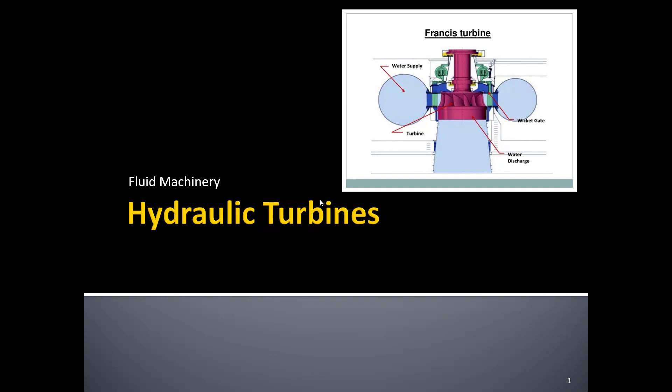Start with hydraulic power plant. The main components of hydraulic power plant or hydroelectric power plant are: one, the storage system; two, the conveying system; and three, hydraulic turbine.

With control system and electric generator, leading to the transmission line. The storage system consists of a reservoir with a dam structure and water flow control in terms of sluices and gates. The reservoir may be at a high level depending on the availability of such location.

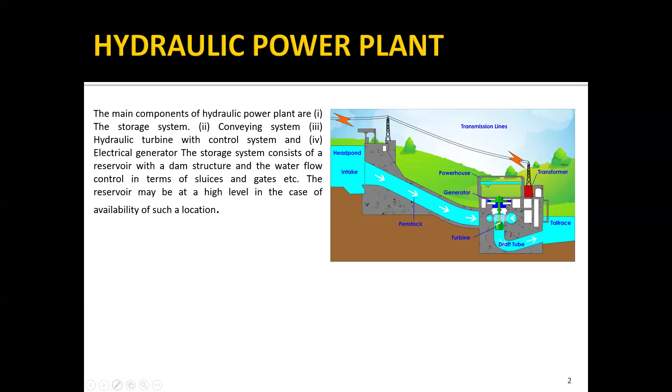So, classification of turbines. We're now on hydraulic turbines. The main classification isn't about the hydroelectric power plant topic, but about the turbine itself. So, the main classification depends upon the type of action of the water on the turbine.

These are: one, the impulse turbine, as shown in this figure. And two, the reaction turbine.

For the explanation: in case of impulse turbine, all the potential energy is converted to kinetic energy in the nozzle. The impulse provided by the jet is used to turn the turbine wheel, then the pressure inside the turbine is atmospheric. So that's the impulse turbine.

In reaction turbines, the available potential energy is progressively converted in the turbine. And the reaction of accelerating water causes the turning of the wheel. These are again divided into radial flow, mixed flow, and axial flow machines. Radial flow machines are found suitable for moderate levels of potential energy and medium quantities of flow.

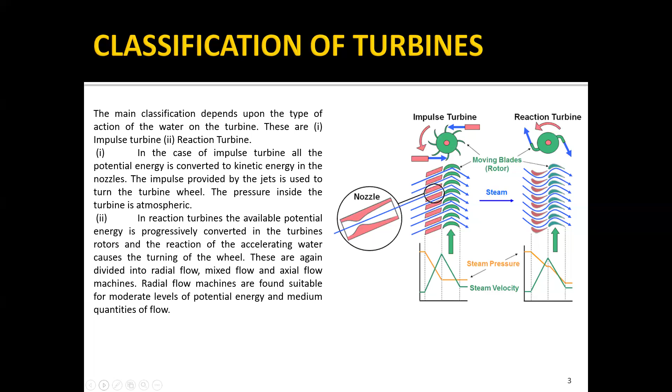So, similitude and model testing - we'll discuss that later. We're just in the introduction here. In fluid mechanics, this topic exists, and in fluid machinery, there's also a topic on similitude and model testing, so we'll discuss that too.

This is for turbines only. Hydraulic turbines are mainly used for power generation, and because of this, these are large and heavy. The operating conditions in terms of available head and load fluctuation vary considerably.

In spite of sophisticated design methodology, it is found the design has to be validated by actual testing. In addition to the operation at design condition, the characteristics of operation under varying input-output conditions should be established. It is found almost impossible to test a full-size unit under laboratory conditions. So in case of variation of the operation from design condition, large units cannot be modified or scrapped easily.

So the idea of similitude and model testing comes to the aid of the manufacturer. Instead of making the actual machine, you make a model first. In the case of this machine, more than three variables affect the characteristic of the machine.

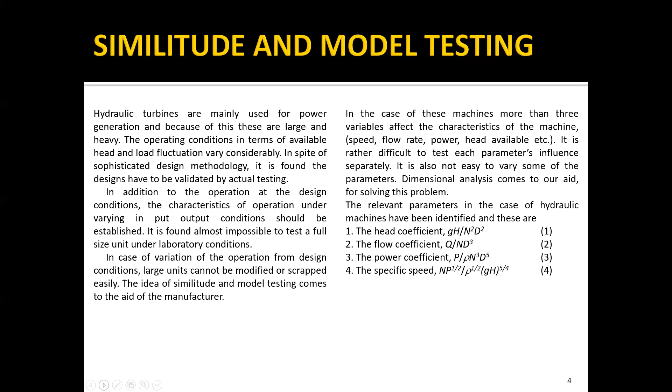Consistent sets of units should be used to obtain numerical values. All the four dimensionless numbers are used in model testing. So if you use consistent units, it becomes dimensionless.

The last parameter has particular value when it comes to choosing a particular type under given available inputs and outputs. This is specific speed, so you base the selection of turbine on this. It has been established partly by experimentation and partly by analysis that the specific speed to some extent indicates the possible type of machine to provide the maximum efficiency under the given conditions.

So figure 1 illustrates this idea. The representation is qualitative only. Note that as head decreases for the same power and speed, the specific speed increases. So this is the dimensionless specific speed.

So its unit is radians, okay? Why radians? That means it's dimensionless. Radians is dimensionless. Why is that so for radians?

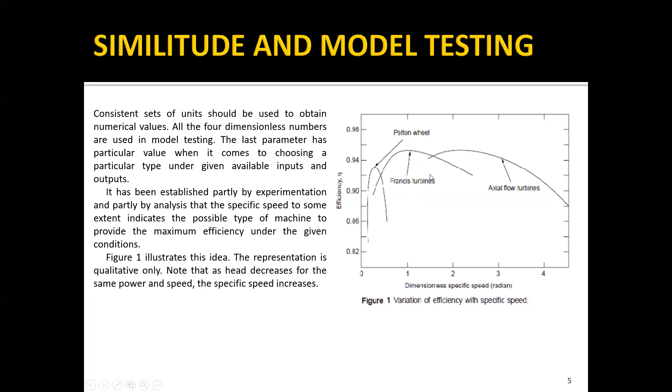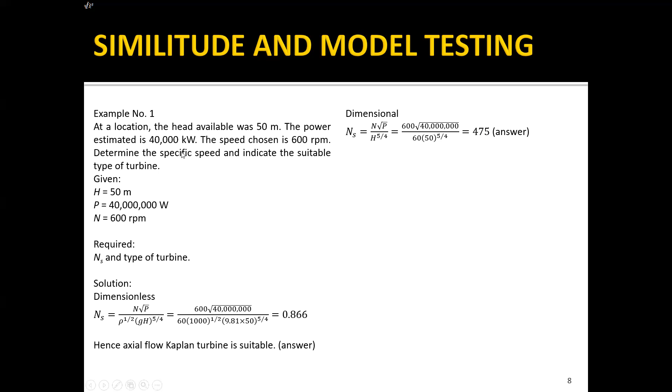Next, model and prototype. It is found not desirable to rely completely on design calculation before manufacturing a large turbine unit.

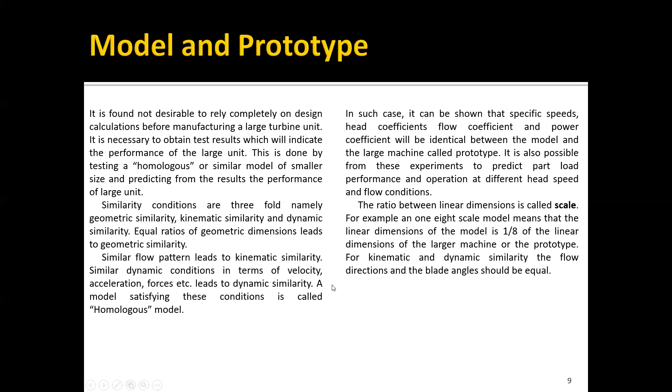Example number 2. At a location, investigation yielded the following data for the installation of a hydro plant. The head available is 200 meters. Power available is 40,000 kilowatts. The speed chosen was 500 RPM.

A model study was proposed. In the laboratory, the head available was 20 meters. It was proposed to construct a 1/6 scale model.

So the actual value, divide by 6, that becomes your model. Determine the speed and dynamometer capacity to test the model. Also, determine the flow rate required in terms of the prototype flow rate. That's for the actual.

Given: HP is equal to 200 meters, HM is 20 meters, PP is 40 million watts, NP is 500 RPM, DM over DP is 1/6. This is the scale model dimension.

Solution: the dimensional specific speed of the proposed turbine, NS, is equal to N times the square root of P over H to the 5/4, which is 500 times the square root of 40 million divided by 60, divided by 200 to the 5/4.

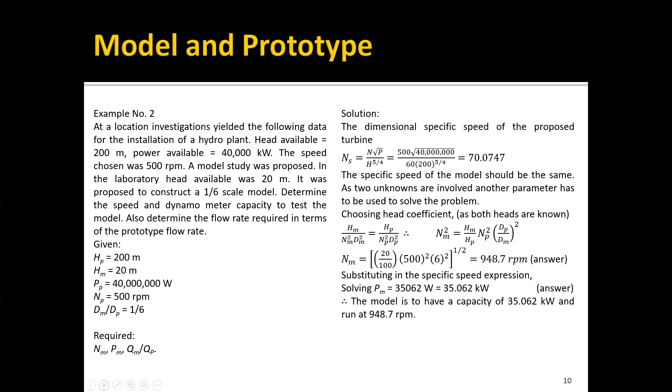NS the same, so solve for P. So the model is to have a capacity of 35.062 kilowatts and run at 948.7 RPM. So substitute and show here how you solved the PM in the specific speed, because it's equal anyway. And the flow ratio can be obtained using the flow coefficient.

So from the flow coefficient, this comes out: QM over QP is equal to NM over NP, and DM cube over DP cube, which is 948.7 over 500 times 1/6 cube, equals 0.0877. Or QM is 1/113 of QP. So that's your answer. For the derivation, that's up to you.

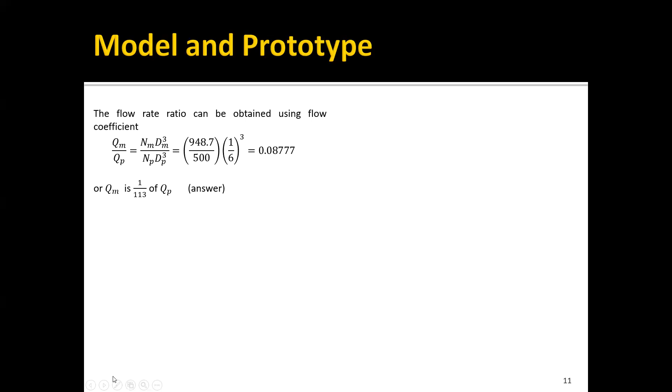So, unit quantities. The dimensionless constants can also be used to predict the performance of a given machine under different conditions, as the linear dimension will be the same and will not be taken into account in the calculation. So the scale is 1.

Thus, the head coefficient will now be h1 over n1 squared d squared is equal to h2 over n2 squared d squared, or h2 over h1 is equal to n2 squared over n1 squared. Now, the head will vary as the square of the speed.

Now, the flow coefficient will lead to q1 over n1 d cube is equal to q2 over n2 d cube, or q2 over q1 is equal to n2 over n1. So the flow coefficient will be proportional to n, and using this previous relation...

q2 over q1 is equal to the square root of h2 over h1, or q over the square root of h is constant for a machine. This constant is called unit discharge. Similarly, n2 over n1 is equal to the square root of h2 over h1, or n over the square root of h is constant. This constant is called unit speed.

Using the power coefficient, p1 over n1 cubed d exponent 5 is equal to p2 over n2 cubed d exponent 5, or p over h exponent 3 over 2 is constant. This constant is called unit power. Hence, when H is varied in a machine, the other quantities can be predicted by the use of unit quantities.

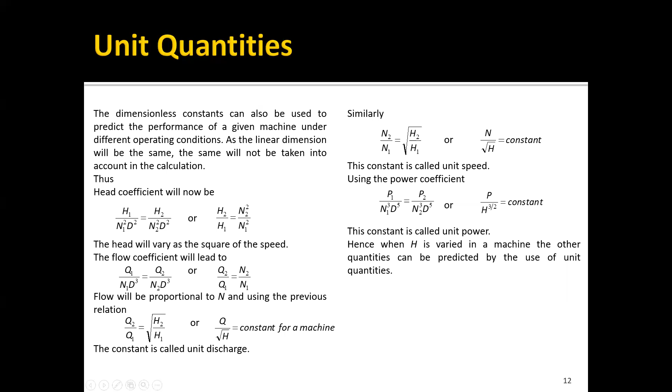Example number 3: A turbine is operating with a head of 400 meters and a speed of 500 RPM, and a flow rate of 5 cubic meters per second, producing a power of 17.66 megawatts. The head available changes to 350 meters. If no other corrective action was taken, what would be the new speed, flow, and power? Assume efficiency is maintained constant.

Given, let's label these as 1 and 2. H1 is 400 meters and N1 is 500 RPM. Q1 is equal to 5 cubic meters per second. P1 is equal to 17.66 megawatts. H2 is 350 meters; this is what changed. When H changes, it becomes H2. So what are the new N2, Q2, and P2? Required: the new speed, flow, and power.

Solution: We have H1 over N1 squared is equal to H2 over N2 squared. So N2 is equal to 500 times (350 over 400) to the 0.5, which equals 467.7 RPM.

Then Q1 over N1 is equal to Q2 over N2. So Q2 over Q1 is equal to N2 over N1, which equals (H2 over H1) to the 0.5. So Q2 is equal to 5 times (350 over 400) to the 0.5, which is 4.677 cubic meters per second.

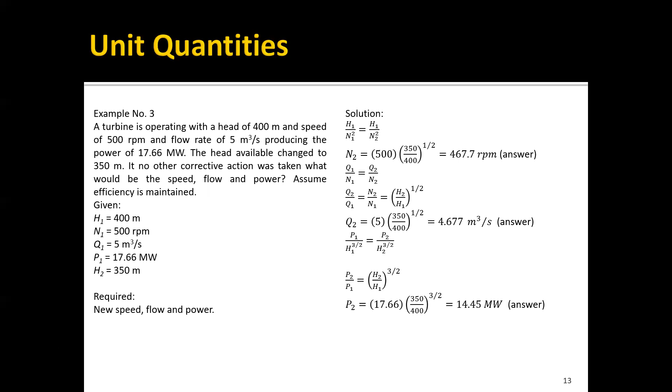Turbine efficiencies. Okay, so the head available for a hydroelectric plant depends on the site conditions.

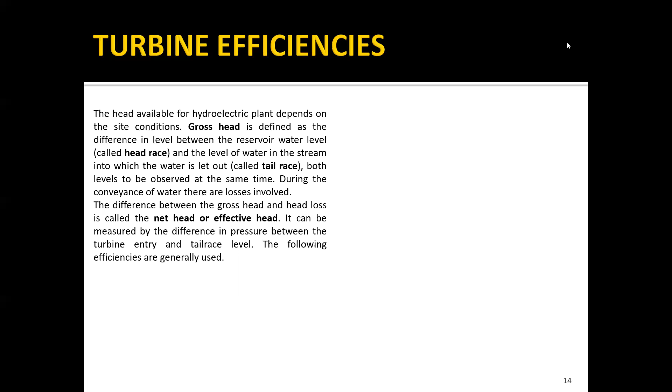Okay, so gross head is defined as the difference in level between the reservoir water level, this is the head race, and the level of water in the stream into which the water is let out, the tail race. So that's the difference between this and this, the difference in height.

The difference between the gross head and head loss is called the net head or effective head. These are the friction losses. It can be measured by the difference in pressure between the turbine entry and the tail race level.

The following efficiencies are generally used.

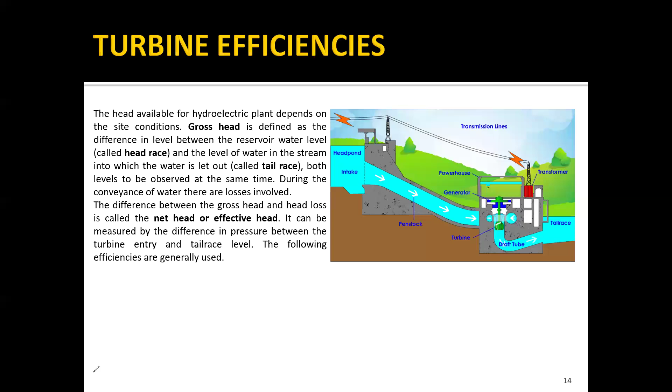Hydraulic efficiency is defined as such. It is possible that some water flows out through the clearance between the runner and casing without passing through the runner.

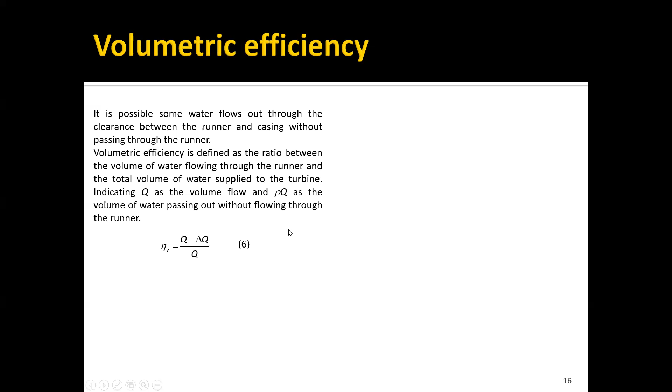Delta Q is the volume of water passing out without flowing to the runner, which represents the leakage. So volumetric efficiency eta sub v is equal to Q minus delta Q, over Q. This is not expressed in percentage.

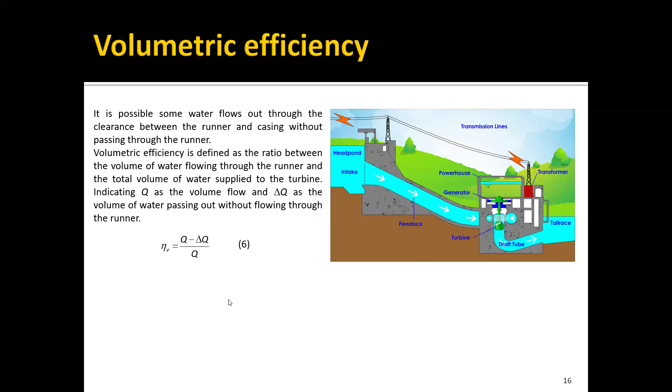Mechanical efficiency: the power produced by the runner is always greater than the power available at the turbine shaft. This is due to mechanical losses at the bearing, windage losses, and other frictional losses.

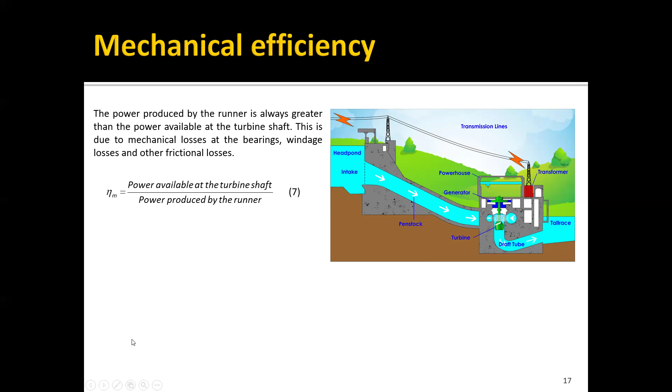Mechanical efficiency eta m is equal to power available at the turbine shaft divided by power produced by the runner. We already discussed the derivation of that.

Next, overall efficiency. This is the ratio of power output at the shaft and power input by the water at the turbine inlet. eta 0 is equal to power available at the turbine shaft divided by rho Q GH.

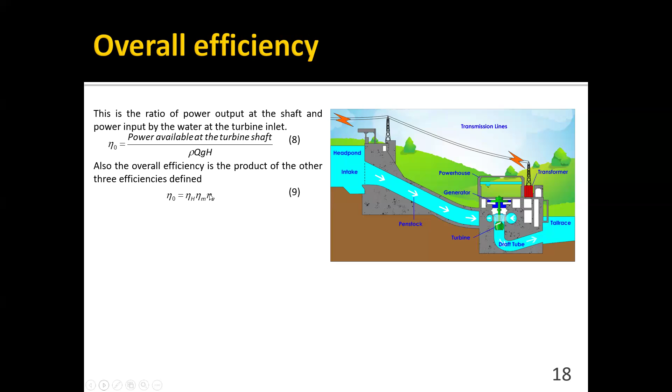Also, the overall efficiency is the product of the other three efficiencies: hydraulic efficiency, mechanical efficiency, and volumetric efficiency. NO is multiplied to get the overall, which pertains to the generator output. But here, we focus only on the mechanical side.

Next is the Euler turbine equation. This is used in hydraulic turbines.

This means that the fluid momentum can have three components at entry and exit. This also means that the force exerted on the runner can have three components. Out of these, only the tangential force can cause the rotation of the runner and produce work.

This is at the blade. The axial component produces a thrust in the axial direction, which is taken by a suitable thrust bearing. So in designing the bearing, you must consider the axial component.

The radial component produces a bending of the shaft which is taken by the journal bearing. The radial direction is normal to the shafting, so that's why it causes bending.

Thus, it is necessary to consider the tangential component for determining work done and power produced. This is important: the work done or power produced by the tangential force equals the product of mass, tangential force, and tangential velocity, which we already discussed.

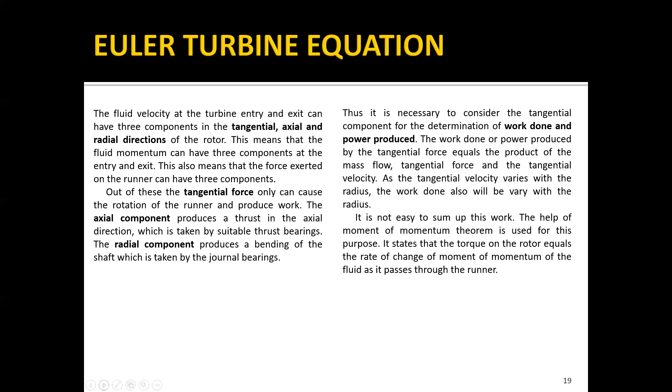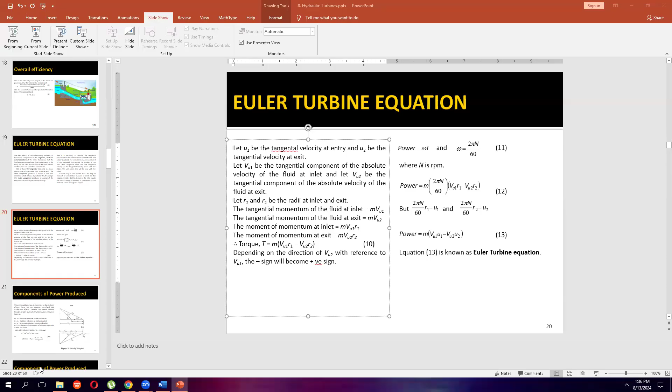Okay, components of power produced. The power produced can be expressed as due to three effects: the dynamic, centrifugal, and acceleration effect.

Consider the general velocity triangle at inlet and exit of the turbine runner shown in figure 3. So ito yung inlet and outlet. V1, V2 are absolute velocities at inlet and outlet. V sub r1, V sub r2 are relative velocities at inlet and outlet. U1, U2 are tangential velocities at inlet and outlet. B sub U2 and B sub U1 are the tangential components of absolute velocities at inlet and outlet.

So outlet or exit: from the inlet velocity triangle, V sub u1 is equal to V1 cosine alpha 1. Kita nyo, di ba? Kung marunong kayo sa trigo, hindi kayo mahihirapan.

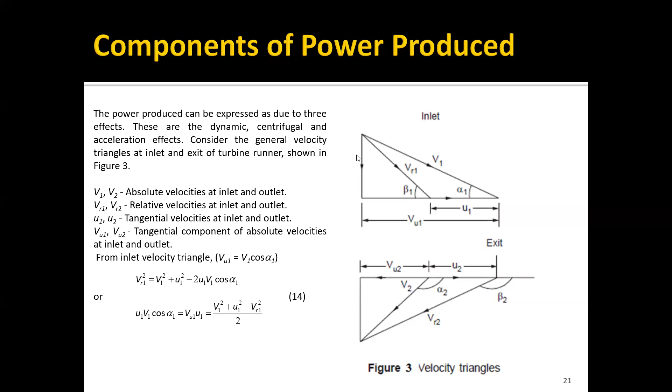From the inlet velocity triangle, B sub R1 squared is equal to B sub 1 squared plus U sub 1 squared minus 2 U1 B1 cosine of alpha 1, by the cosine law. Or U sub 1 B sub 1 cosine alpha 1 is equal to B sub U1 times U1, which is equal to B sub 1 squared plus U sub 1 squared minus B sub R1 squared, all over 2.

Now, from the outlet velocity triangle, V sub u2 is equal to V sub 2 cosine alpha 2. So B sub R2 squared is equal to B sub 2 squared plus U sub 2 squared minus 2 U2 B2 cosine alpha 2. So U2 B2 cosine alpha 2 is equal to U2 B sub U2, which is equal to B sub 2 squared plus U sub 2 squared minus B sub R2 squared, all over 2.

Substituting in the Euler's equation, the power per unit flow rate: here B sub U2 is in the opposite direction to B sub U1, so it becomes negative. So M times U sub 1 B sub U1 plus U sub 2 B sub U2 is equal to one half of M times B sub 1 squared minus B sub 2 squared plus U sub 1 squared minus U sub 2 squared plus B sub R2 squared minus B sub R1 squared. Kaya nag-plus siya.

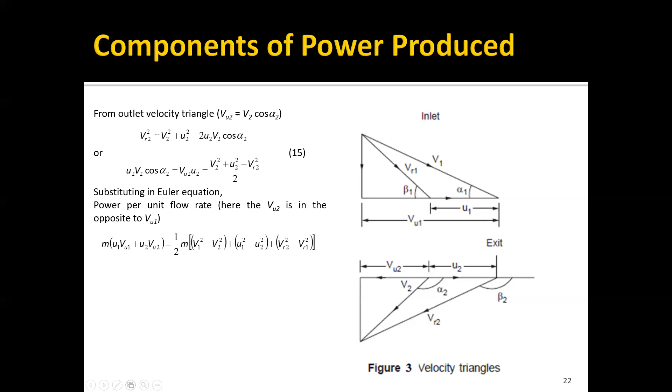B sub 1 squared minus B sub 2 squared over 2 is the dynamic component of the work done. U sub 1 squared minus U sub 2 squared over 2 is the centrifugal component of work, and this will be present only in a radial flow machine. B sub R2 squared minus B sub R1 squared over 2 is the accelerating component, and this will be present only in a reaction turbine.

The first term only will be present in Pelton or impulse turbine of tangential flow type. In pure reaction turbine, the last two terms only will be present. Okay, note that.

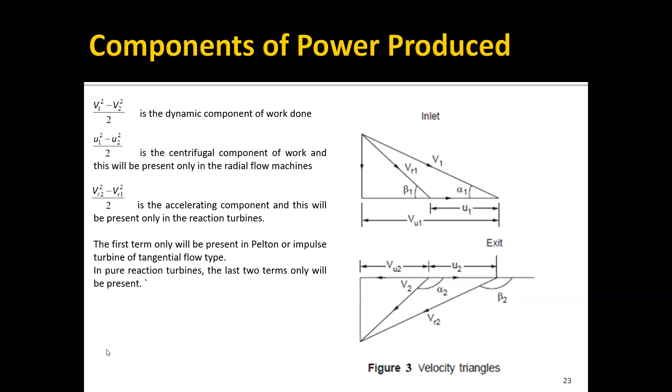Wait, ayan. So in impulse reaction turbines of radial flow, all the terms will be present. The Francis turbine is of this type. So yan, nami-mention na yung mga types ng turbines.

Impulse reaction turbines: the degree of reaction is defined by the ratio of energy converted in the rotor to the total energy converted. So R is equal to U sub 1 squared minus U sub 2 squared plus V sub R2 squared minus V sub R1 squared, over that plus V sub 1 squared minus V sub 2 squared. Tawag dyan is degree of reaction sa impulse reaction turbine.

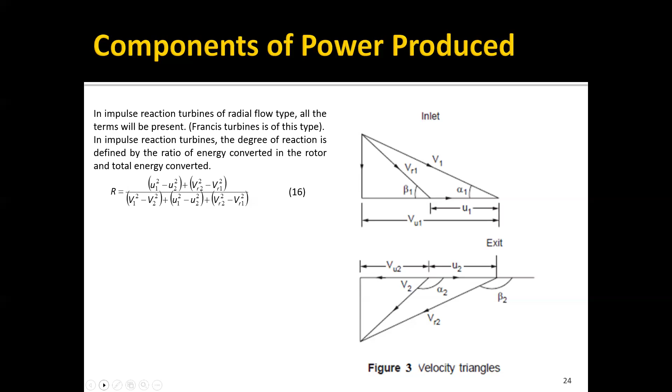Next is the Pelton turbine, one of the types of turbines. This is the only type used in high head power plants. This type of turbine was developed and patented by L.A. Pelton in 1889.

A sectional view of a horizontal axis Pelton turbine is shown in figure 4. That's the Pelton turbine - here's its appearance. It has a casing, then a nozzle, deflector, tail race, which is the water level going up, and other accessories.

The main components are: 1, the runner with the vanes or buckets, which catches the jet, causing it to rotate. This part is atmospheric.

The buckets are fixed on the periphery of the runner, connected to the nozzle assembly with control spear and deflector, so it concentrates here and comes out as a jet. 3, brake nozzle. And 4, the casing.

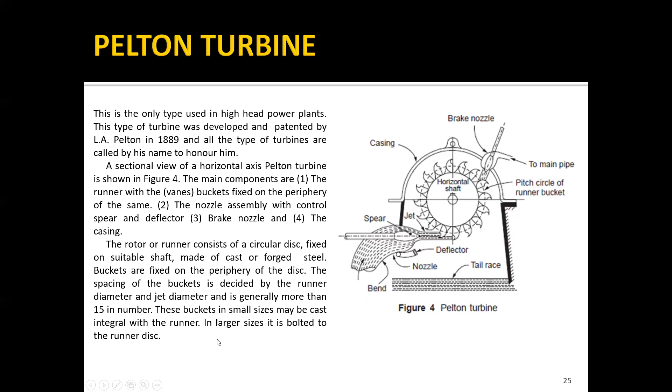This bucket in small sizes may be cast integral with the runner. In large sizes, it is bolted to the runner disc. The buckets are also made of special material and the surfaces are well polished.

Originally, spherical buckets were used, and Pelton modified the bucket to the present shape. It is formed in the shape of two half ellipsoids - that's analytic geometry - with a splitter connecting the two.

A cut is made in the lip to facilitate all the water in the jet to usefully impinge on the bucket. This avoids interference of the incoming jet on the jet impinging on the previous bucket.

Equations are available to calculate the number of buckets on the wheel. The number of buckets C is equal to D over 2d plus 15, where D is the runner diameter and d is the jet diameter. So more than 15 is the number of buckets.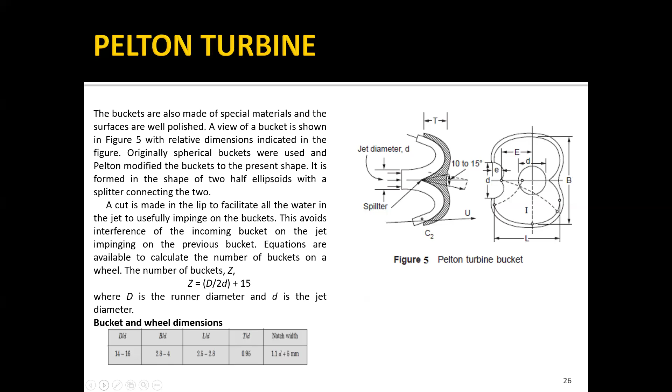In this case, the jet direction is parallel to the blade velocity or tangential velocity of the runner, where VU1 is equal to V1 and VR1 is equal to V1 minus U. Note that U has no subscript because it is constant.

In the ideal case, VR2 is equal to VR1, but due to friction, VR2 is equal to K times VR1, and U2 is equal to U1, sorry, is equal to U.